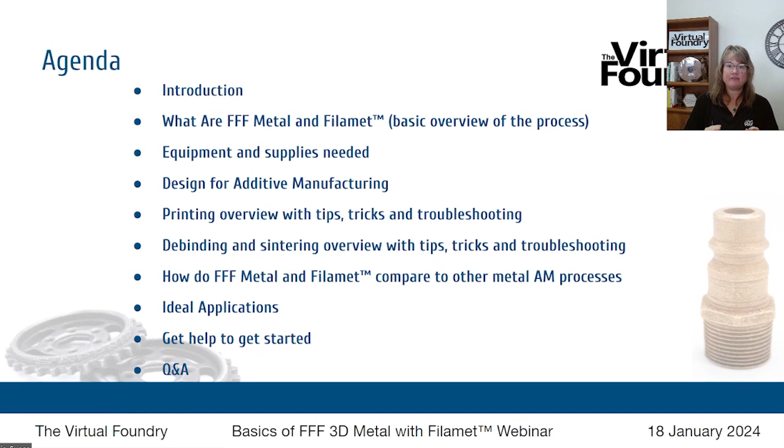Today we're going to be talking through FFF metal 3D printing with Filamet. Here's what we're going to look at: What is it? What equipment and supplies do you need? How about designing for the process? Printing overview with tips, tricks, and troubleshooting. Debinding and sintering, that heat process, with tips, tricks, and troubleshooting. How does the Virtual Foundry's FFF metal 3D printing process compare to other metal additive manufacturing processes? What are the ideal applications for FFF metal? And we're also going to give you some help to get started.

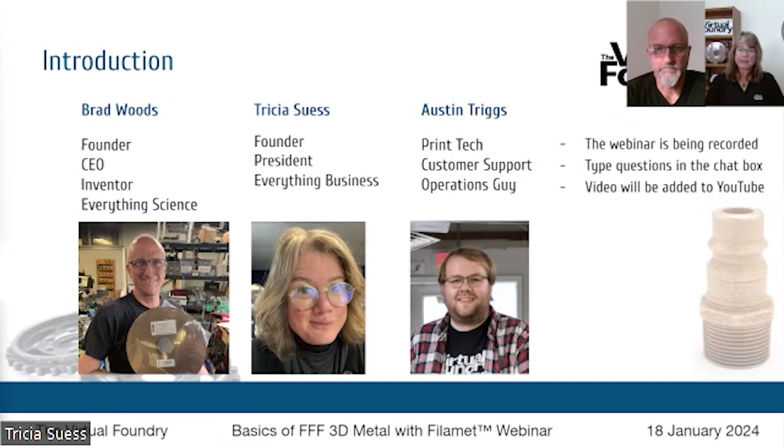So, FFF metal basics. FFF stands for Fused Filament Fabrication. There are lots of other terms for this style of 3D printing: FDM, which is Fused Deposition Modeling, BMD, Bound Metal Deposition, and lots of other fun acronyms that people come up with as we go along. And the technology continues, but FFF metal and lots of other metal additive manufacturing techniques follow this same 3-step process.

Print, debind, and sinter. In the printing phase, you are simply getting material into a shape, and in this case you're using a regular FFF, FDM style 3D printer to get that shape.

Filamet from the Virtual Foundry is made of powdered metal, glass, or ceramic - we do have other versions as well - encased in a PLA binder. Now there are some other proprietary ingredients included there, so we keep that part of it secret, but it's basically metal powder with a PLA binder. So that's why these materials can print just like PLA in a standard 3D printer.

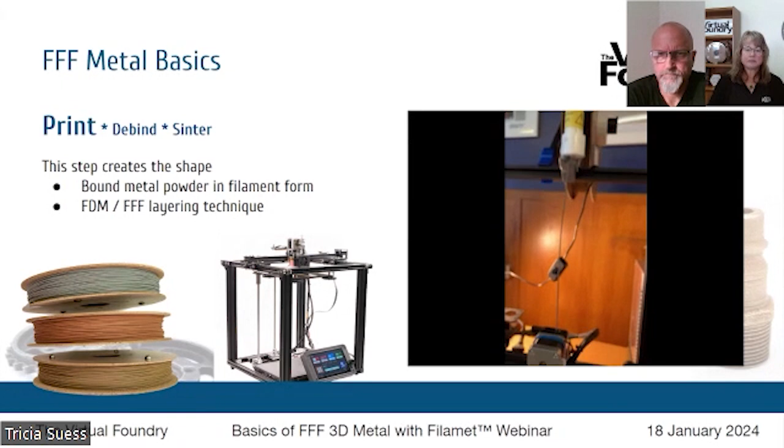This video shows our bronze filament being printed on a Creality Ender 3 3D printer, which is a pretty basic model. We've used lots of Creality printers around here and really like the brand, and we'll talk through a couple of other brands that work well in just a minute. So you can see that's a really basic overview of the printing process there.

Now, if you want, at that point you can stop and polish your print to a beautiful metal shine. But if you want your part to be full metal, you're going to go through a heat process next.

So step 2 is debind. That's where you are getting the plastic out of your 3D print, and you'll do that with heat in a standard kiln. We'll talk through the process in a minute, but that's what the debind step does.

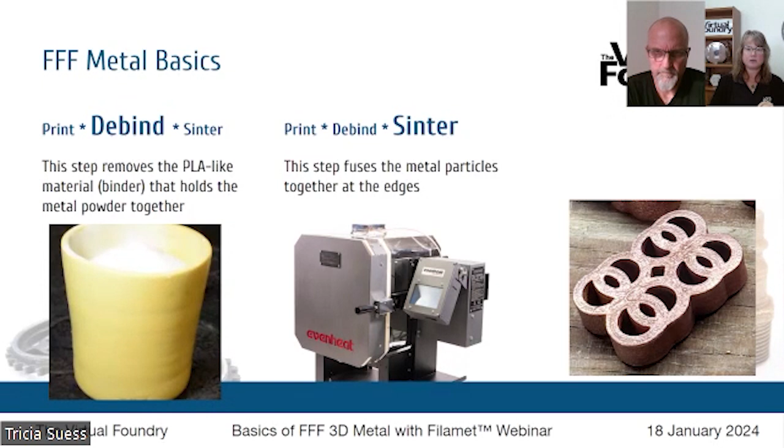And then step 3 is sintering. So you've got all of the plastic out of your part, now you're going to fuse those metal particles together at the edges in a process called sintering.

Now, the equipment and supplies you're going to need to do this 3-step process include a 3D printer. What kind of 3D printer should you use? We get that question quite a bit.

It's an excellent question. Most any standard FFF or FDM style 3D printer will print Filamet. There are a couple of exceptions, though. There are a few brands of 3D printers that lock down your material selection so you can only use their branded material. Obviously, ours won't work in that group.

We have also seen a 3D printer here and there that makes it very challenging for the filament to get through its system and onto your build plate, but those are few and far between. If we're talking about major brands, Creality, Bambu Lab, Ultimaker, Prusa, Raise 3D, and a bunch of others, those all work really well with these materials.

If you want more information, take a look at the podcast listed there, and Austin will drop a link into the chat where we do more of a deep dive on what printers work with Filamet. Direct drive, dual gear direct drive is typically going to be better than Bowden tube. You're going to need a 0.6 millimeter hardened steel nozzle, so being able to change your nozzle is important as well.

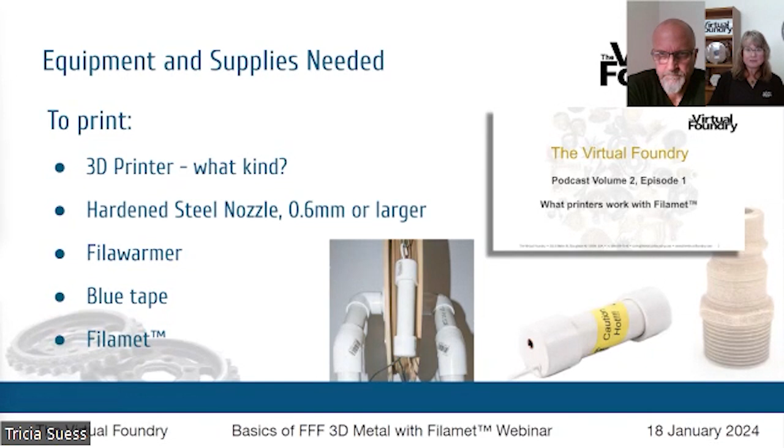So Austin talked about isopropyl alcohol, which applies to glass build plates. Otherwise, blue painter's tape really does the trick nicely. And then, of course, you need some Filamet.

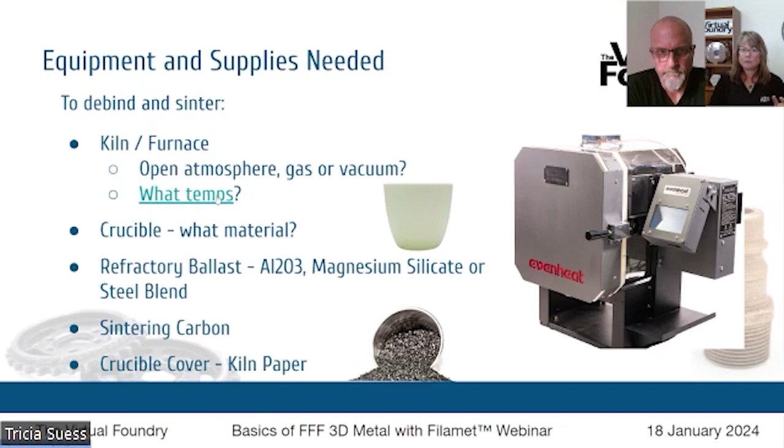Now for the debind and sinter process, the equipment and supplies you'll need are, first of all, a kiln. You can use a regular desktop kiln. The two requirements for the kiln are that it has a programmable controller and that it can hold the sintering temperature of the material you're working with for several hours. Well, how do you know what that is?

On our website, you'll find a list of our materials and the sintering temperatures you'll need to achieve. Your kiln will need to hold those temps for several hours, so as long as it has a max temp a little bit above that, you'll be fine.

Our process is suited for open atmosphere, meaning you don't have to use any gas or vacuum—though you can. Oxygen needs to be prevented from reaching your part during sintering, whether you accomplish that with the method we use, which we'll talk about in a minute, or with gas or vacuum if you're used to that. But an open atmosphere standard kiln, like a pottery kiln, is great.

You'll need a crucible. The crucible is that little white cup you see in the center there. That crucible is going to hold your part and its support material during the debind and sinter process.

You'll need refractory ballast—I just said sintering material, and that's what I mean by that. We're going to use Al2O3, or aluminum oxide, and magnesium silicate when working with copper and bronze. We're going to use steel blend when working with the steels.

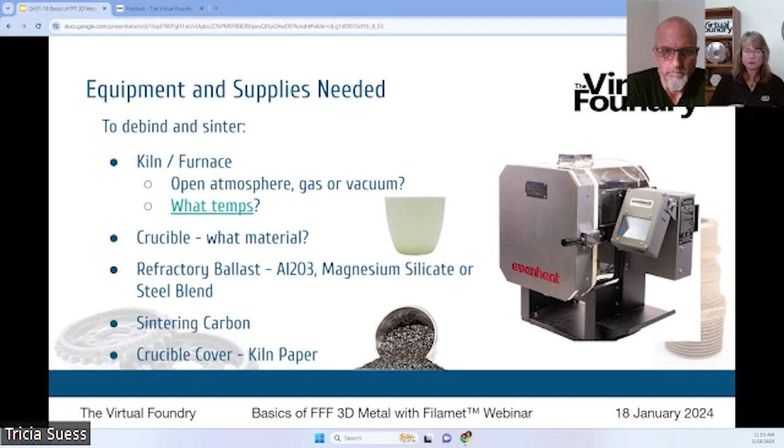You'll need sintering carbon, and that's the item that manages oxygen and keeps it from damaging your print during the sintering process. And then a crucible cover, like kiln paper or a ceramic plate. We'll talk more about the purpose for that in a minute.

Now, looking at design for additive manufacturing, here's where I'm going to ask Brad to chime in a little bit, but there are some part shape properties that work best in this process. We've certainly got a sweet spot for that. And I'll tell you, after Brad talks through those, I'll give you some tips on going outside of those parameters.

Am I on? Yeah, go ahead, Brad. Okay.

Pieces that are thick tend to be more challenging. So picture during the debinding process, the plastic that was holding the metal particles together needs to leave the object. When you have a thick, blocky part, it can cause distortions as it's leaving, and it can cause the surface of the part, we call it pillowing, where it will delaminate slightly and get a pillowing look to it. This can be overcome, but the easiest parts to do are ones that are, say, 3 to 5 millimeters thick at the maximum, which makes it very simple for the binder to leave the part during debinding.

Brad's talking about thickness. Now you see a couple of parts on the screen there, and I do have those in my hand. So if you can see me a little bit, here is that Easter Island head. It's massive, about 6 pounds of copper, about the same size as my head. This one is sintered, but it did suffer a little bit from exactly what Brad is talking about.

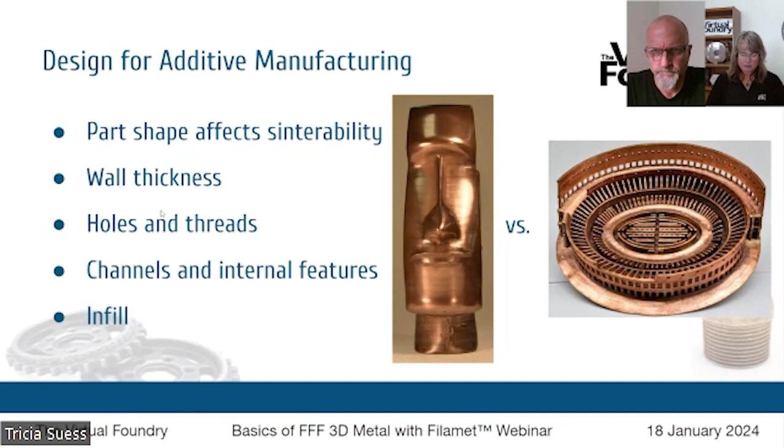Now we're going to talk about printing overview. So the basic print settings are: nozzle is, like I said earlier, going to be very similar to regular PLA. Nozzle temperature of 210 C, a flow rate of 135%, or extrusion multiplier 1.35, depending on how your slicer names that setting.

The sweet spot for infill is 70% infill with 3 wall lines. Now, if you want to go outside of that - I want my part to be 100% thick, or I want my part to be 100% hollow - we have tips for going outside of that 70% infill as well, in a podcast about how much infill should I use. So Austin will throw a link to that in the chat as well.

Now, what support material should you be using when printing with Filamet? You will use any support material that you would use with standard PLA, including PLA itself. So all of that support material will be broken off. Using the PVA water soluble support is a great option as well, because then you can just soak all of that off before you go into the heat process.

Now I'm going to hand it over to Brad again to talk about making adjustments as you begin the printing process. He'll talk about those two photos that you see here. And Brad, talk to us about clogs as well in your discussion.

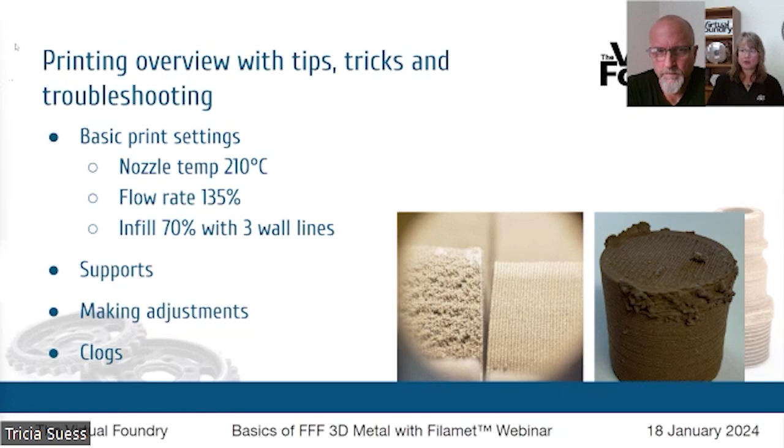That process is going to take about a day. It's pretty long, so maybe 12 hours from room temperature to room temperature. So you set it and let it run overnight. Come back the next day, you'll take your crucible out. In the case of bronze and copper, you're going to empty the contents of the crucible and then go through that same packing process again, but this time with magnesium silicate.

Bury your bronze or copper part in that magnesium silicate, and now you're going to cover that magnesium silicate with a layer of sintering carbon. The sintering carbon is very important—it's what prevents your part from being oxidized during the sintering process. So you can't use too much sintering carbon. It's meant to be consumed as it reacts with the oxygen.

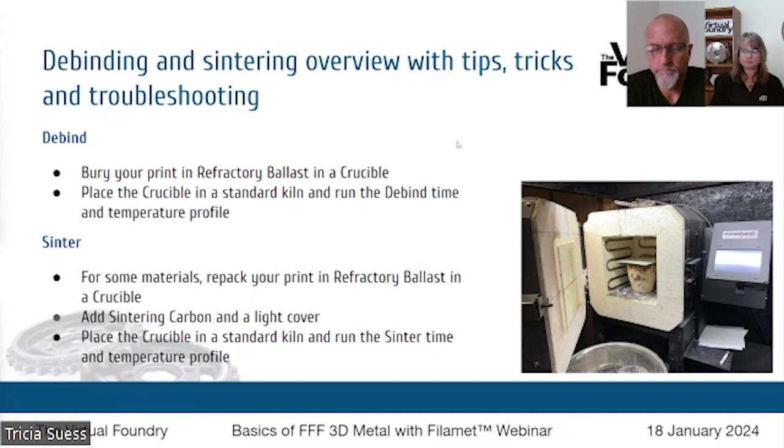Now, one question that we get quite a bit is, can those sintering powders be reused? And the answer is yes, absolutely. We've got some information for you on that. Austin is going to put a link to a blog post that talks about the sintering powders, reusing them, and when you should replenish those and get fresh powder.

Now, some things that can happen during the debinding and sintering process, or the most common things that can go awry, are pillowing or doming. This is something that Brad mentioned earlier. That's when the gas coming out of the part pushes out on the part and creates a dome, or causes some delamination between those outer layers.

So step number one that we're going to tell you is to really pack your part for the debind cycle. You can think about even ramming like they do in other industries—just get it nice and tight. Even apply a weight to the top of your crucible for that debind process. The idea is that you want to compress your part in that ballast.

One of the more common errors that we see in sintering is that the part comes out completely black. Well, black means it's been oxidized. If your part comes out black and crumbly, it was oxidized.

So question number one we're going to ask is how much sintering carbon was left at the end. Is there any new looking, fully black sintering carbon left over? That's going to be your key. And if there was not, then absolutely your part was oxidized. The cure for that is more sintering carbon, but also applying that cover to help limit the amount of oxygen the sintering carbon needs to manage. So that's going to be the key there.

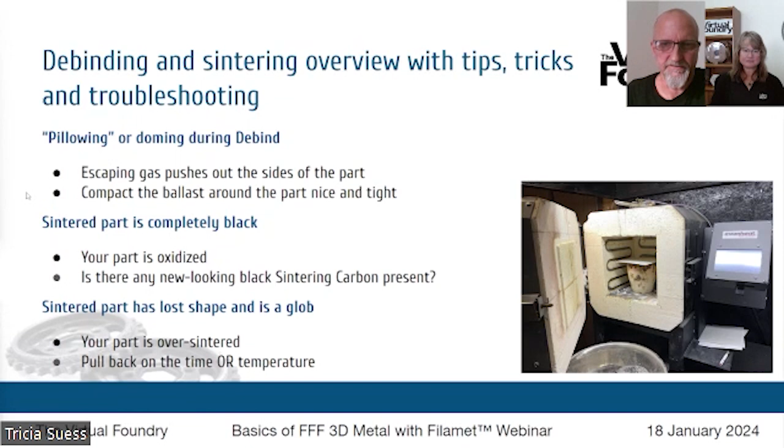Yeah, I'd like to reiterate this topic. The number one troubleshooting solution we provide is reminding people to follow the instructions more closely. It seems like you should be able to just improvise a little bit, like you're throwing some extra seasoning in it or something like that, but just get a victory, get a good part, and then start to change the process.

Now, lots of people asked about aluminum in the registration forms. Aluminum and titanium are different. They are reactive in the presence of oxygen and heat, which is no bueno. So you're not going to be able to sinter those in standard kiln equipment like we've been talking about. They both require specialized kiln environments in order to do that processing correctly.

And we're going to add a little bit of a note about tungsten as well. Our Rapid 3D Shield tungsten filament is a really awesome special product. It's designed to be a non-toxic 3D printable replacement for lead in radiation shielding applications.

And the beauty of this material is that it provides that benefit in its green state, meaning as printed. So you don't need to go through that heat process to get the benefit of X-ray shielding that you can 3D print on your FFF 3D printer. So that one's really special.

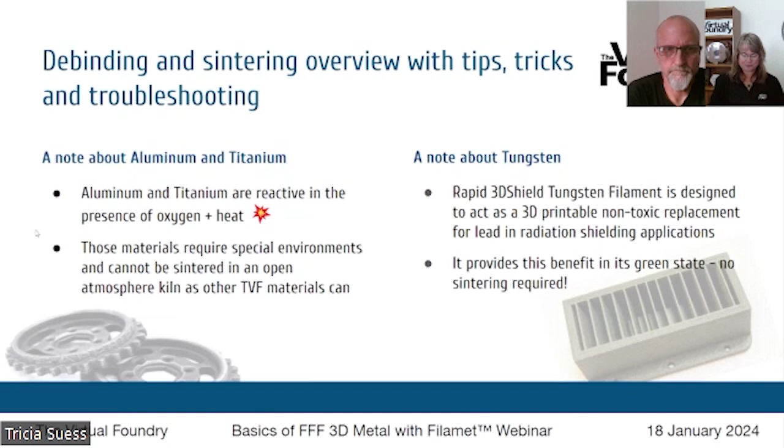Now there is some really fun debinding and sintering technology in the works, and one of those that's most exciting to me personally is using a standard household microwave. The general process is the same. You're going to use a ballast material, bury your print in that ballast material, and run a prescribed time and temperature profile. You're just using a microwave instead of a kiln.

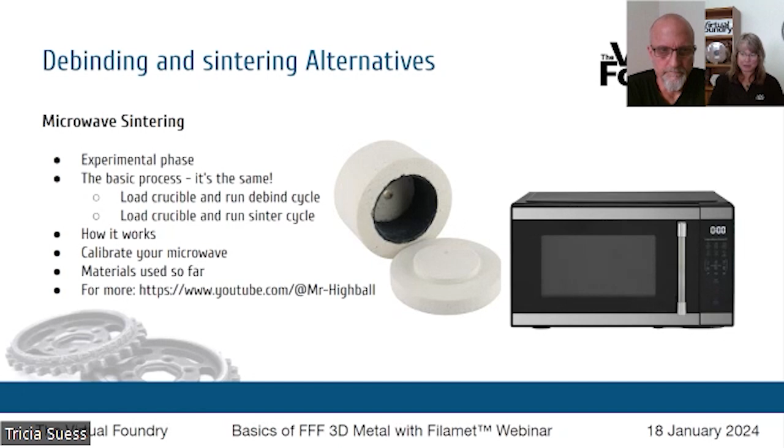We have some information on our website in the blog section about microwave sintering and calibrating your microwave for the process. You can also take a look at Mr. Highball's YouTube channel. He has done the most work on this process and is beginning to release a step-by-step tutorial on it. He started with aluminum and titanium, which we just talked about being a little more involved with the debinding and sintering process. He wanted to go with the most challenging materials first, and he has had some successful parts come out of that. So take a look at that if you're interested in that very exciting topic.

Now the sintering chart, this is on our website, the same chart. You'll find this on the debinding and sintering instructions page, but it's going to talk through the different materials, what crucible type is great, what refractory, what sintering powders you need, the debind temperature, the sub-sinter temperature in the case of steels, which you'll see in the instructions, and the sinter temperature.

So that's all on our website. This gives you a basic overview of the sintering temperatures you need to reach. If you have a kiln that gets to 2350F, or say 1280C, or cone 10 in pottery speak, you've got it covered.

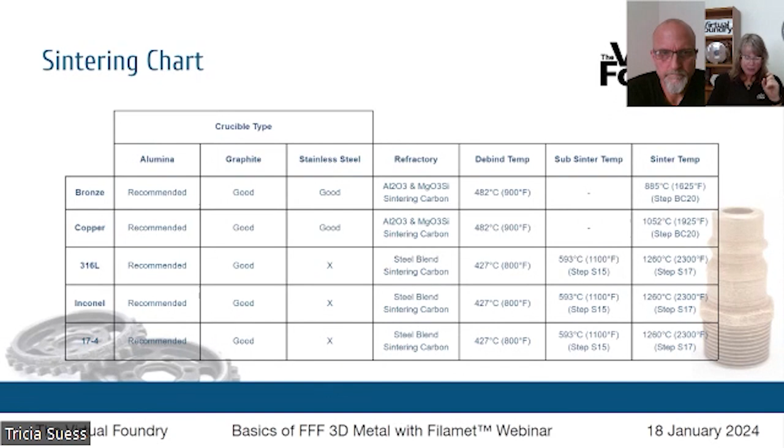This is a great question about comparing Virtual Foundry to BASF, and it's an excellent lead into the next topic where we do a comparison of the Virtual Foundry with the other FDM metal processes out there, including Desktop Metal, the Markforged Metal X, and BASF Ultrafuse. This data is from a webinar that we did in May of 2022, so some of it may be a little dated.

But you can see an overview here, talking more specifically about BASF Ultrafuse. The printing process is going to be very similar. The Ultrafuse likes to have a heated chamber on the printer. The Virtual Foundry's Filamet does not require that. But printing is very similar. Where it gets really different is in the debinding and sintering process.

Ultrafuse uses a catalytic debind process and a special sinter process. You need to send your part away to a service bureau to perform those for you. You can't do those in-house. There are some equipment brands looking to create a system that will process the BASF materials from start to finish for you. Again, you're dealing with that chemical debind situation, though, rather than just using heat to debind. So that's the major difference. The printing is fairly similar, the end result is the same. It's that debind and sinter process that's really going to be different. You can see here some of those differences.

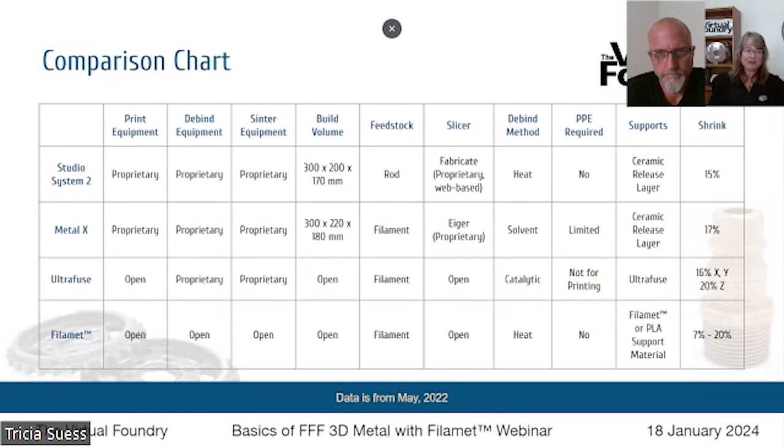Another difference with the Virtual Foundry is that you can do the entire process offline. Your part data never needs to be sent to the cloud. So your slicer, your 3D printer, your kiln, none of that needs to be connected. Your part data can be 100% secure. You're doing the full process in-house on your own.

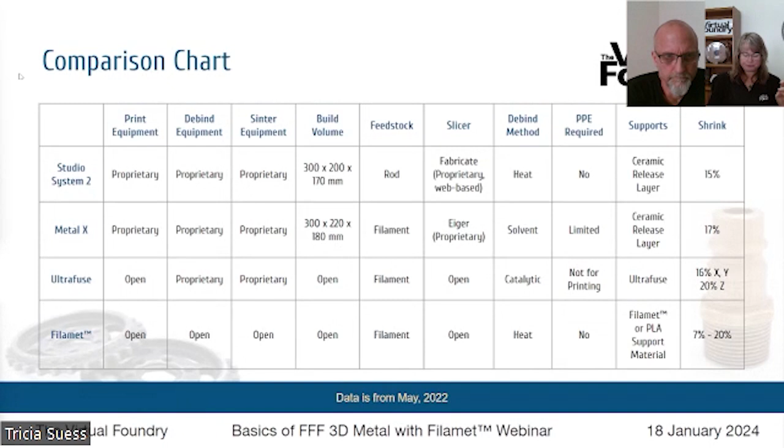Is the costs. So a couple of you asked about costs for the system and getting parts out of this system. We do have a video on our YouTube channel that talks about going all in on a full metal 3D printing system and what your first part cost is. We give all the caveats and exceptions to what's being said, so you'll get the full information there.

But here you can see the Desktop Metal Studio system and the Metal X by Markforged are a significant investment. UltraFuse and the Virtual Foundry are more of a similar investment on the filament side of things. The equipment is where it gets a little bit different. You can buy the kiln of your choice to process the Virtual Foundry materials. With BASF UltraFuse, you're sending your part away.

UltraFuse does deeply subsidize the cost of the debinding and sintering process. I think you only need to pay something like $50 per kilogram of parts. Your part can be away from you for about 2 weeks. If you wanted to buy a system like some equipment manufacturers are working on, I'm hearing prices of $100,000 and up, so you're getting into similar territory as the closed systems offered by Desktop Metal and Markforged.

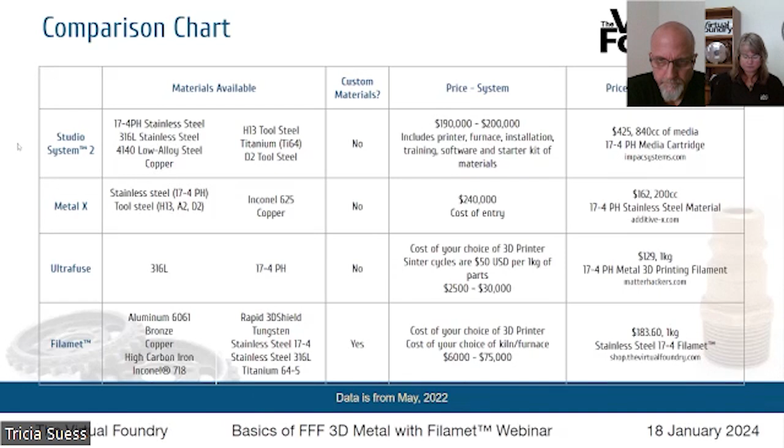Now, ideal applications for this process. Brad, I'm going to hand it over to you here to talk through the ideal applications and some applications to avoid.

Sure. People's first thoughts when they think of metal 3D printing is they think of it as a replacement for CNC and casting and things like that. And we encourage people to think about this a little bit differently. It's a nice complement to those things, but our objective is not necessarily to produce millions of parts using this technology. So it works great for one-offs. Research and innovation is probably our largest buyer. I mean, that's where most of what we send out goes, is to different labs and schools and things like that.

Parts to avoid are just things that are big, bulky, take excessive amounts of stress and strain. This is a new way to fabricate metal parts, and historically this doesn't come up very often, so it requires you to think about it a little bit differently. Be open-minded. Don't necessarily try to replace what you're already doing. Look for new methods of innovating and new solutions.

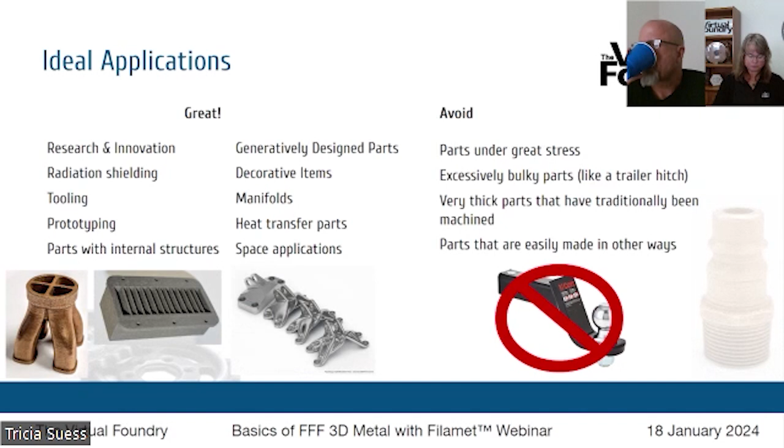Research and innovation is listed there as #1, and that gets us super jazzed. Students and professors all over the world are doing really cool work with this process. Check out the research and white papers page on the website for a list of published papers that are either about this process itself or that use this process in service of another topic like green energy. And there are lots of papers listed there, more come out all the time. So if you are at an educational institution on the webinar here today, and I know that several of you are, you're in good company. Take a look at that list and see what your colleagues have been doing all over the world.

So where to next? How do you even get started? Well, we have a solution for you, and that's the Getting Started bundle.

This bundle is going to include everything that you need to do the full process start to finish, except your printer and your kiln. You will need those yourself. We can help you with the kiln if you need one of those.

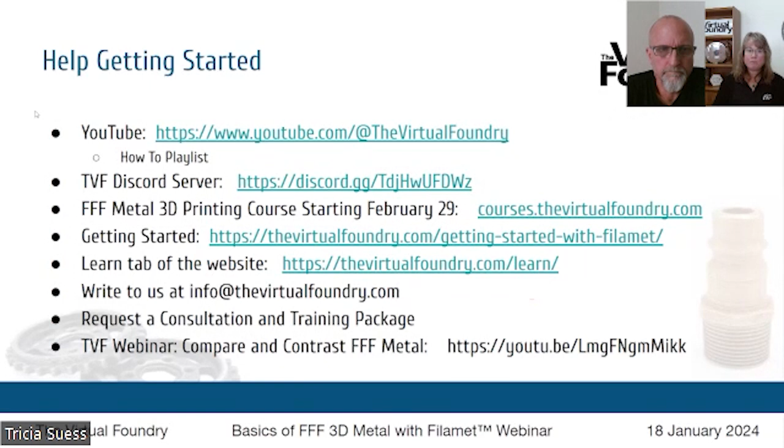Now, from there, more resources to help you get started. I've been talking a lot about the YouTube channel, and for good reason. We have a ton of videos on there. Take a look at the playlists. There is a how-to playlist, and this one will generally walk you in order through the process.

It answers those other ancillary questions. How do I set up my filament warmer? What about those sintering powders? How much filament am I going to need for my part, etc. It goes into some other topics as well, so rely on that YouTube channel as a resource. All of our podcasts are there, and there's also just a couple of other fun things on the YouTube channel.

The Discord server, this is a cool spot for our partner innovators, that's what we call you, our customers, to come in and talk to each other about what you're up to, ask each other questions. The TVF team is in here as well, talking with you. So lots of good info in the Discord channel, come here as well. You will find a link to that on our website on the community tab.

We talked about the course. The getting started page is a great place to start. You're going to see the basics like we talked through here, the equipment that you need, basic printing settings, and then it's going to link you to pages with more information.

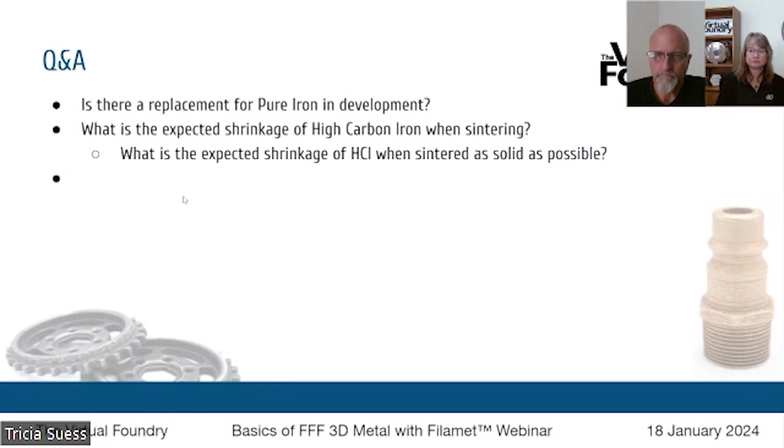So folks are asking about specific materials - we can always make that for you. Yeah, we do offer custom materials. If you've got a special metal, glass, or ceramic that you're interested in and don't see it in a 3D printable form on the market today, we can very likely make that for you. Reach out to us and we'll talk about a custom run for the material that you need.